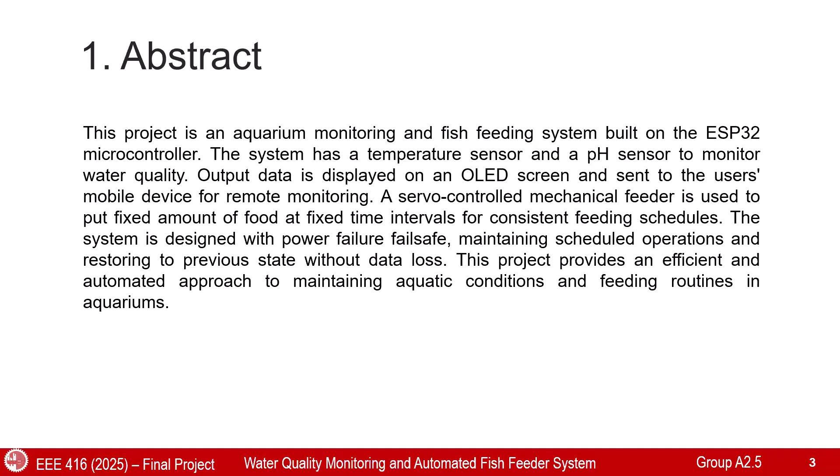Introduction: The aquarium industry requires efficient methods to maintain ideal water conditions. Traditional manual methods are time consuming and prone to errors. Our IoT-based system provides real-time monitoring of critical water parameters and automates feeding, ensuring precise and timely care for fish.

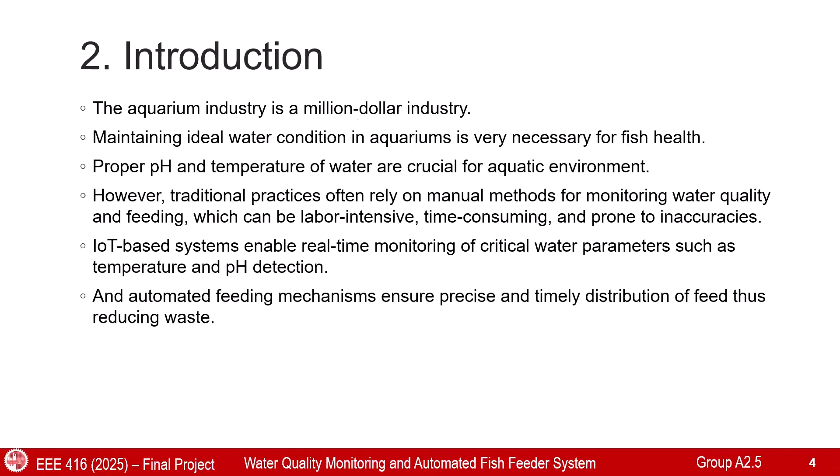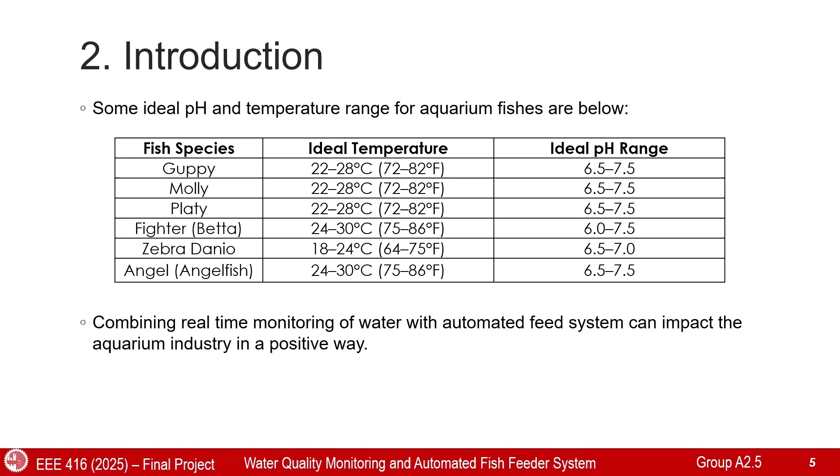Each fish species has specific ideal temperature and pH ranges for optimal health. The system is designed to meet these requirements, providing the right conditions for a variety of species like guppies, mollies, and bettas, ensuring a healthy aquatic environment.

Identification of scope: The system offers real-time monitoring, automated feeding, and fail-safe mechanisms for uninterrupted operation. It is also scalable, making it suitable for both small and large aquarium setups. The Blynk app allows remote monitoring and data logging, providing a user-friendly experience.

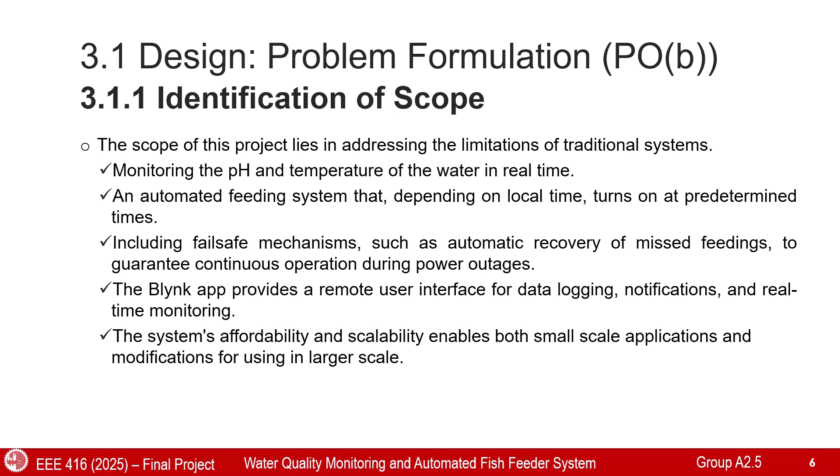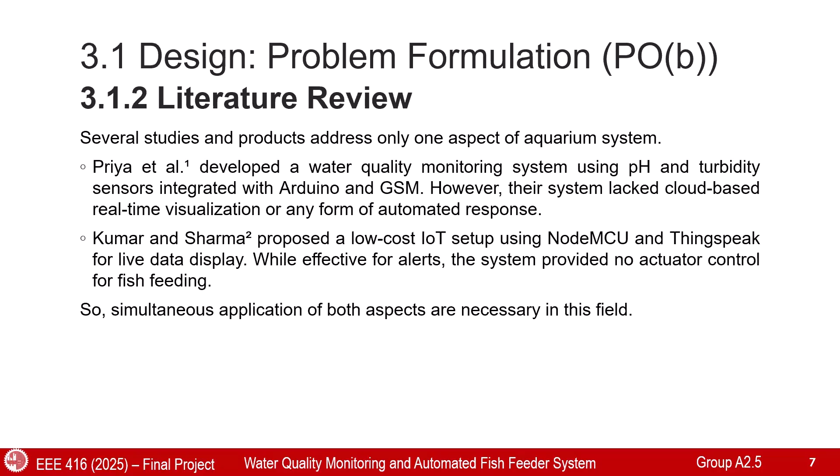Literature review: Existing systems have focused on either water quality monitoring or feeding. However, our project combines both, addressing the gaps by integrating real-time monitoring, automated feeding, and cloud-based control, offering a comprehensive solution for aquarium management.

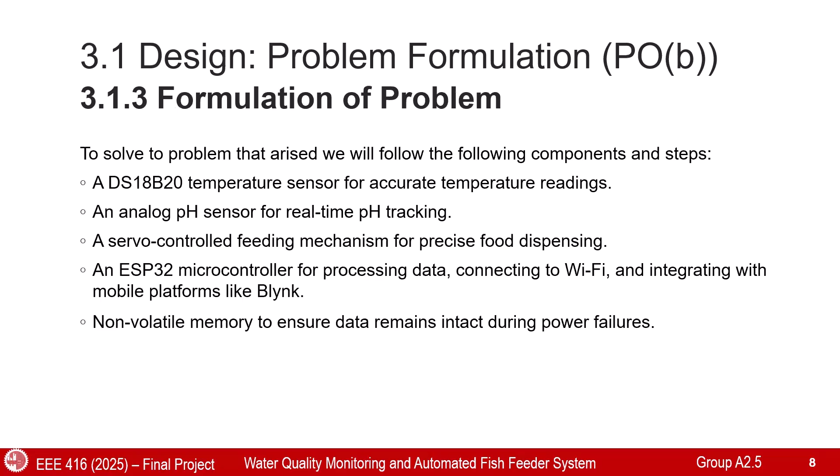Formulation of problem: This project solves the problem of inconsistent water quality and feeding schedules by integrating a temperature sensor, pH sensor, servo-controlled feeder, and an ESP32 microcontroller. Non-volatile memory ensures data retention during power failures, guaranteeing system reliability.

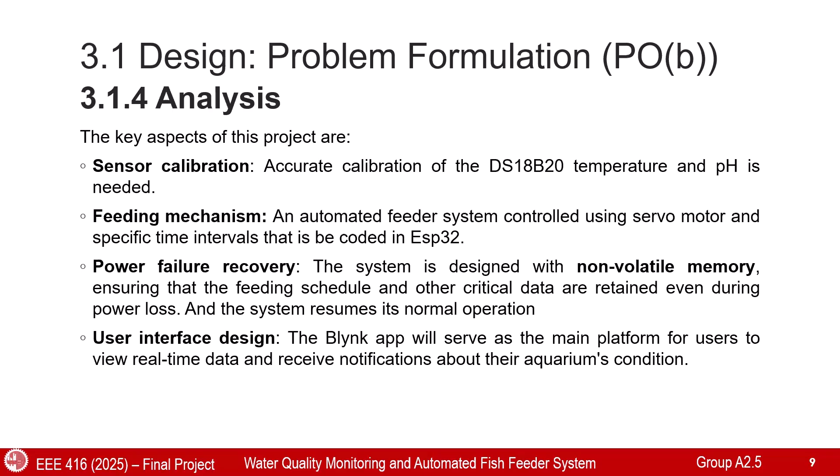Analysis: The system design ensures accurate calibration of sensors for reliable data, automated food dispensing programmed into the ESP32, power failure recovery through non-volatile memory, and a user-friendly interface through the Blynk app.

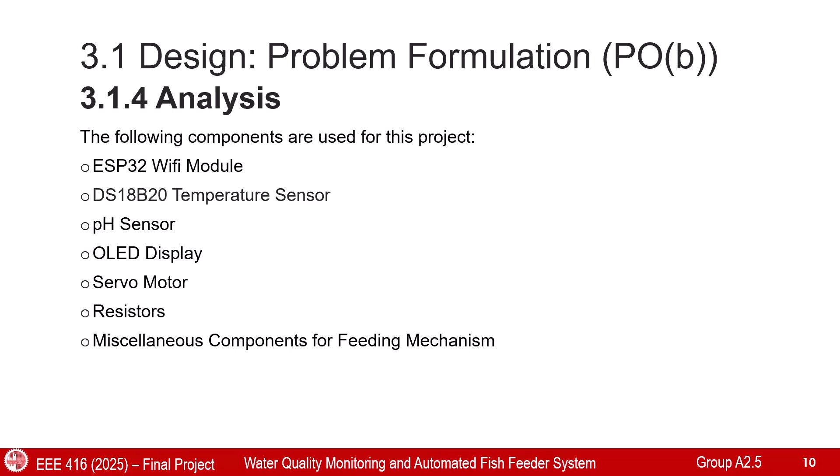The following components are used for this project: ESP32 Wi-Fi module, DS18B20 temperature sensor, pH sensor, OLED display, servo motor, resistor, and miscellaneous components for the feeding mechanism.

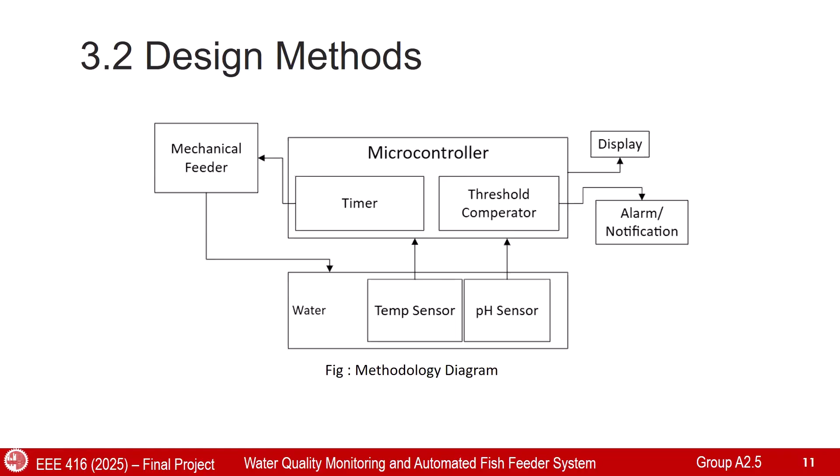So this is the step-by-step methods of our project.

Firstly, initialization takes place. We set up the feeding interval, the threshold for safe range of temperature and pH, then calibrate the sensors and initialize the OLED and servo motors.

For the data processing part, we convert the analog signals of the sensors to output values: for temperature, it's degree Celsius, and for pH, it's on a 0 to 14 scale. We then compare the timer count with the feeding time and show the current temperature and pH values on the OLED screen and in the Blynk app as well.

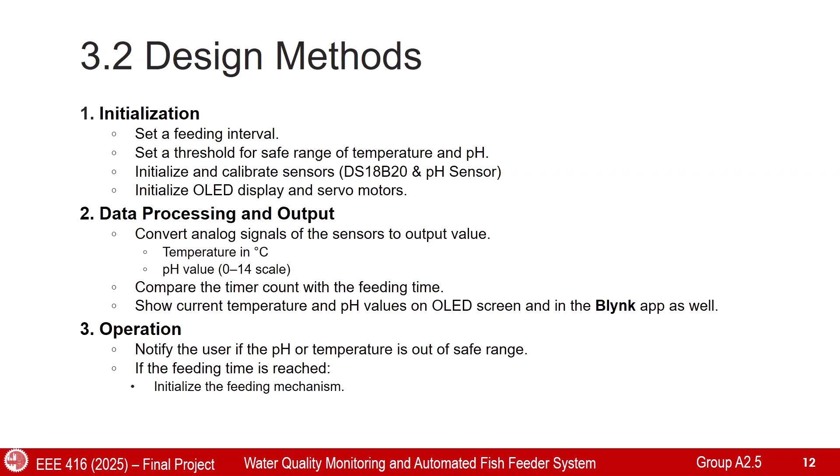For the operation part, we notify the user if the pH and temperature is out of the safe range, if the feeding time has been reached, or if the feeding has somehow been disrupted.

We have also integrated a fail-safe system in our project, and it will access the local time via the Wi-Fi network to use as a reference for the feeding schedule. When the module detects the current local time matching the scheduled feeding time, it will activate the feeding mechanism.

For the feeder, we have used a servo motor to operate the machine, and when the servo motor rotates, the food comes out of the food container into the water.

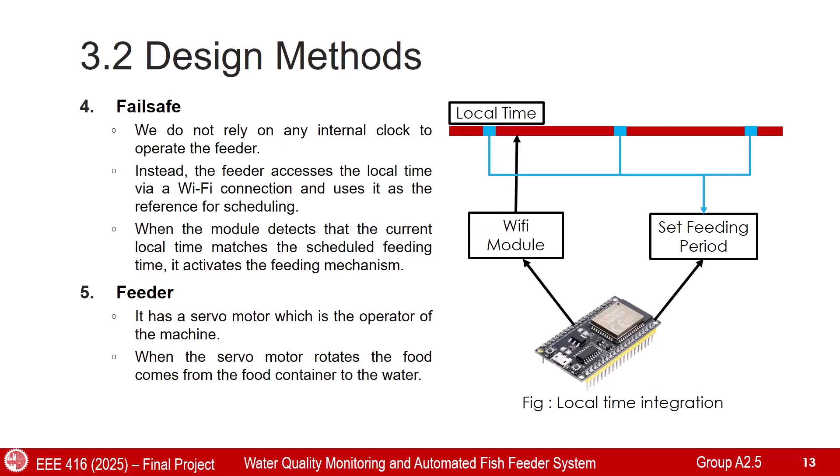Firstly, the pH sensor. The pH sensor is calibrated using standard buffer solutions, as you can see in the pictures, of pH 4, 6.86, and 9.18.

And then we have basically plotted a straight line equation through the corresponding voltages we get for these standard buffers, and using that straight line equation we will be able to find any pH in between these standard buffer ranges.

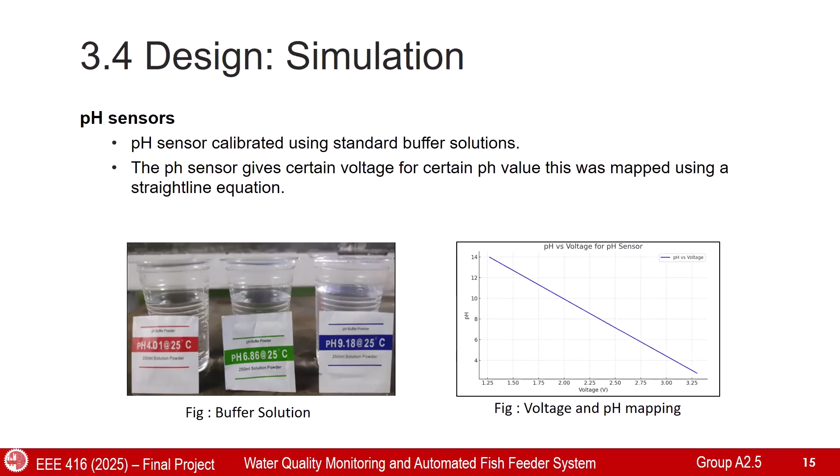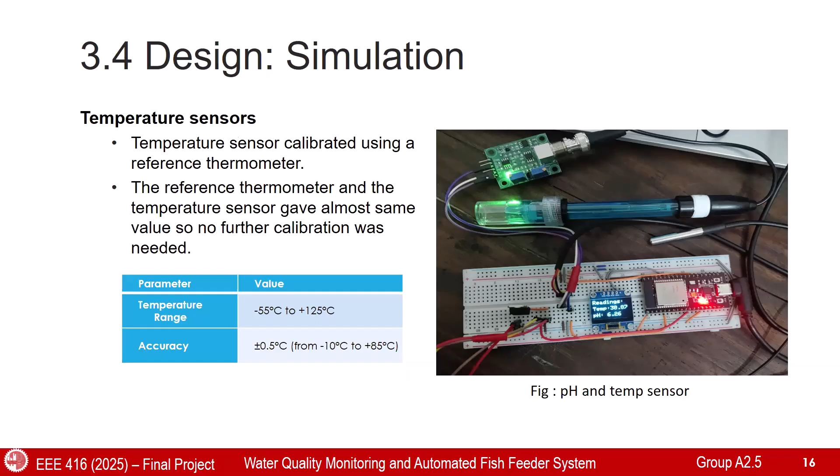For the temperature sensors, we have used a reference thermometer to calibrate it, but as we saw, the reference thermometer and temperature sensor gave almost the same result, so no further calibration is needed. The temperature range of the sensor is -55 to 125 degrees Celsius, and accuracy is ±0.5 degrees, so it is basically very accurate.

And for the mechanical feeder part, we have made some 3D printed components. As you can see from the picture, there will be a screw and some tube for the base, and there will be a holder, and these will all be connected. As you can see in the right picture, all these things are connected to make the whole mechanical feeder part.

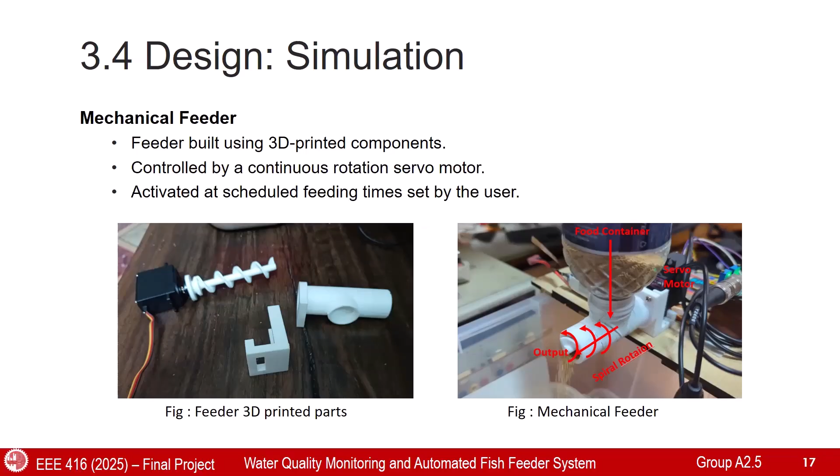And finally, for the real-time monitoring part, we use the Blynk app for data transmission and also showing the values of pH and temperature in the Blynk app. Also in the Blynk app, we will get automatic notifications if any of the range is crossed, or a feeding time is somehow missed.

And we have integrated Wi-Fi connectivity in this data transmission, so it will take continuous power to operate, and it will always be connected to Wi-Fi for any of the information that is needed for the system to work.

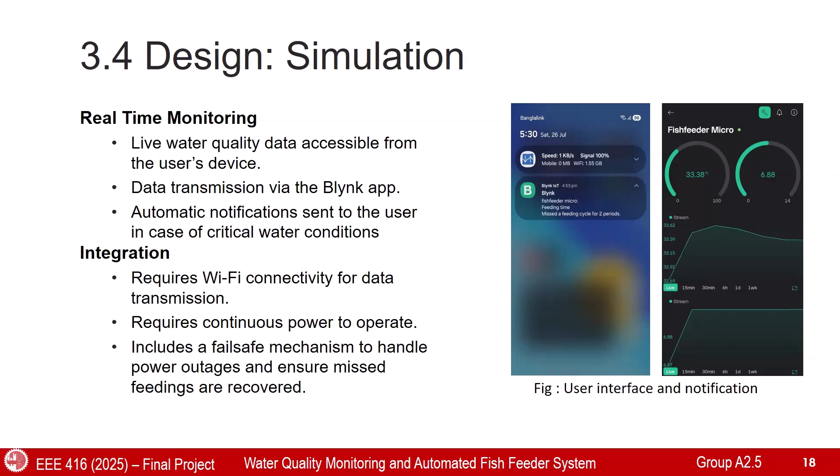Thank you. Hardware design of our project.

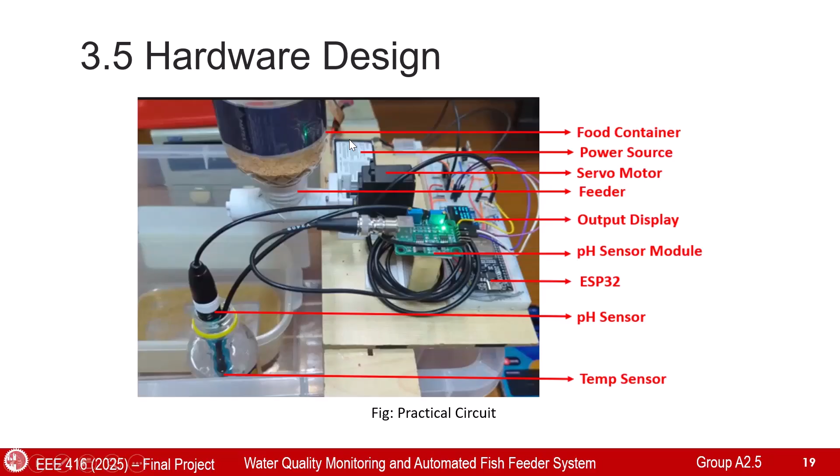In this interface, we can see that we are monitoring the last 15 minutes of data. In the Blynk IoT, we can live monitor the temperature and the pH on our mobile phone.

And also we have added a feature where we will have a notification for any missed feeding periods or any critical value for the pH and temperature. Here is a demo, and also we have added an OLED screen for live monitoring of the water quality.

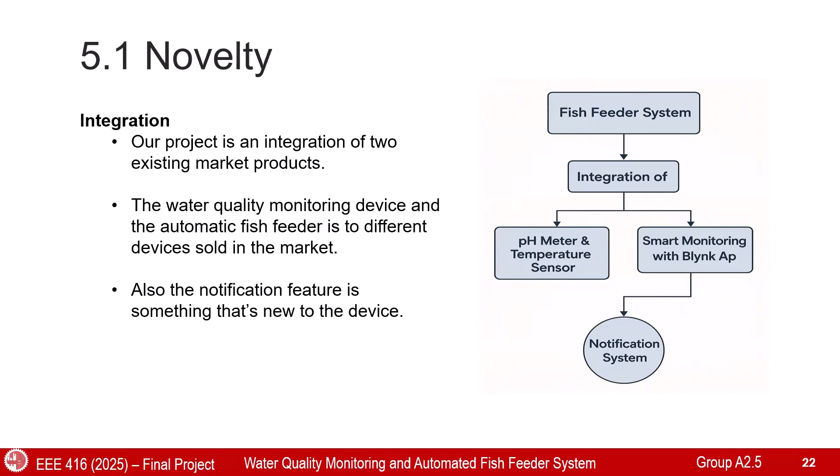For the novelty of our project, we have mainly integrated two existing market products: one is a pH meter and temperature sensor, and another is an automatic fish feeder. We have also added the feature of notification and the live monitoring system, integrating all these three products into one in our project. And we have also added a power loss recovery feature.

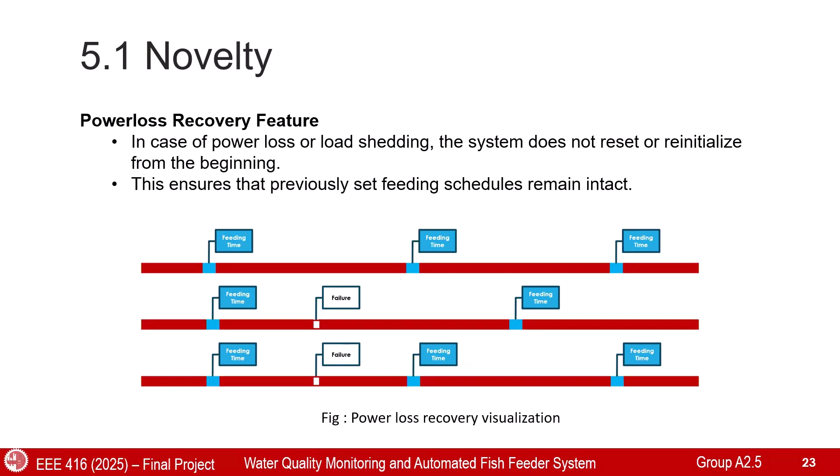Normally, what happens with existing products is that when a power failure occurs in the middle of the feeding time, the system initializes again at the failure point, and the feeding time changes. But for our project, the feeding time will not change, and after the failure, it will recover the previous data.

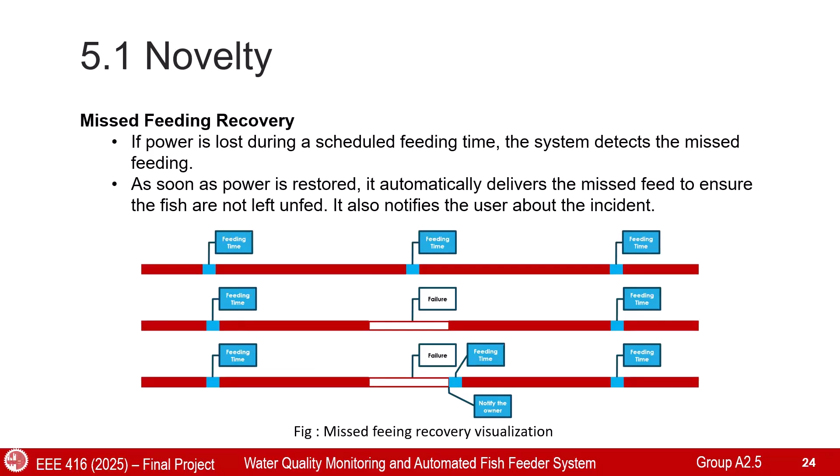Another feature that we have added: what if the power loss failure occurs exactly at the feeding time? For normal devices existing in the market, when a failure occurs directly at the feeding time, the machine will ignore that feeding time and go to the next feeding time to feed the fishes. But for our project, whenever a failure occurs, the system will recognize that failure and notify the owner that a failure has occurred, and as soon as the power comes back, it will feed the fishes as soon as possible.

And another feature that we have added is data recovery. Whenever a power failure happens, the previously saved data in the ESP32 module gets deleted.

The time that we have saved previously gets deleted, so every time we go into the loop, we store and load the data from a non-volatile memory in the ESP32 microcontroller.

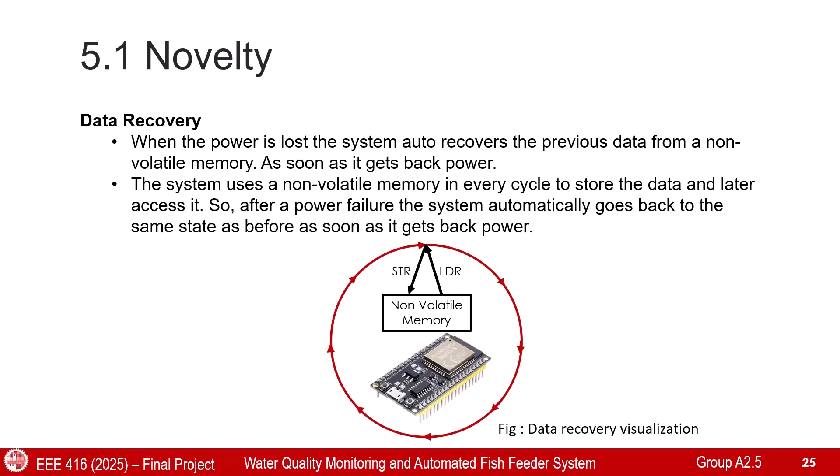In this way, we can recover the data whenever a power loss or failure happens in the project. We have some limitations in our project. The first is its dependency on Wi-Fi or internet connection, as we are taking our reference time from the NTP server for the local time. Whenever the internet connection is disrupted, the machine cannot work properly, and the system is optimized for a single missing period, but when multiple missing cycles happen, the system cannot recover. A battery backup can mitigate the power outage issue, but it still does not solve the Wi-Fi dependency. Any disturbance in the sensor can cause improper data to be shown.

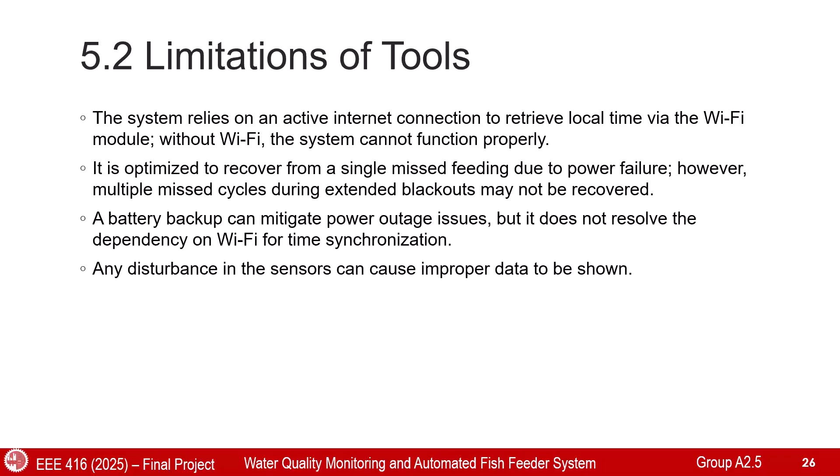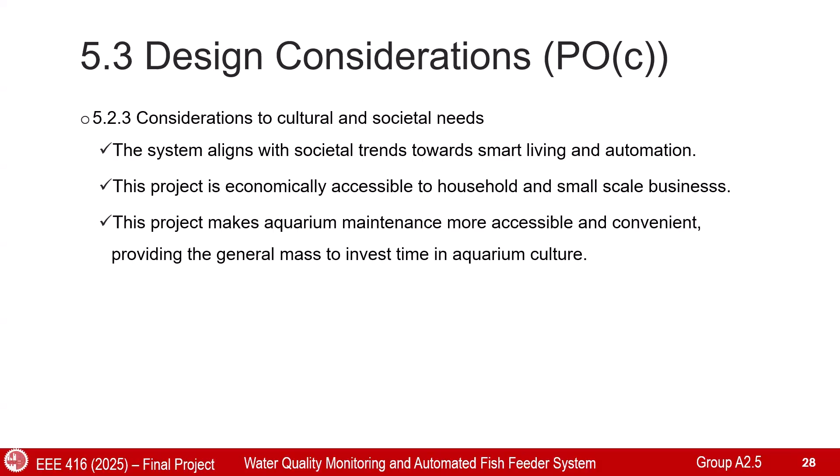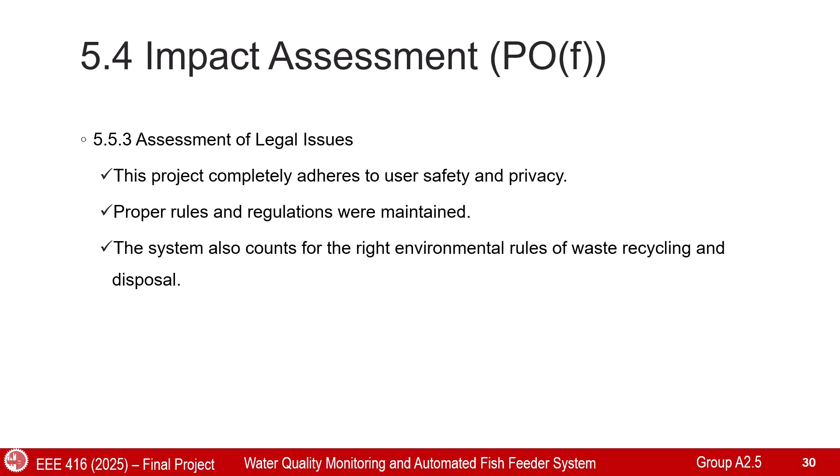This is our design consideration: the public health and safety, environmental, cultural, and societal aspects we have considered for designing our project. This is the impact assessment, meaning our project and subsequent prototype, if industrially produced, what effect it will have on society and culture and health and safety issues, and what we have considered within a legally defined boundary. This is the sustainability evaluation of our project.

If fish feeding is done manually, there are problems related to overfeeding, underfeeding, irregular feeding schedules, water pollution, and real-time monitoring, with a subsequent increase in hazardous materials or polluted water that will be fatal for the fish residing inside. If we use an automated system, we can solve these problems.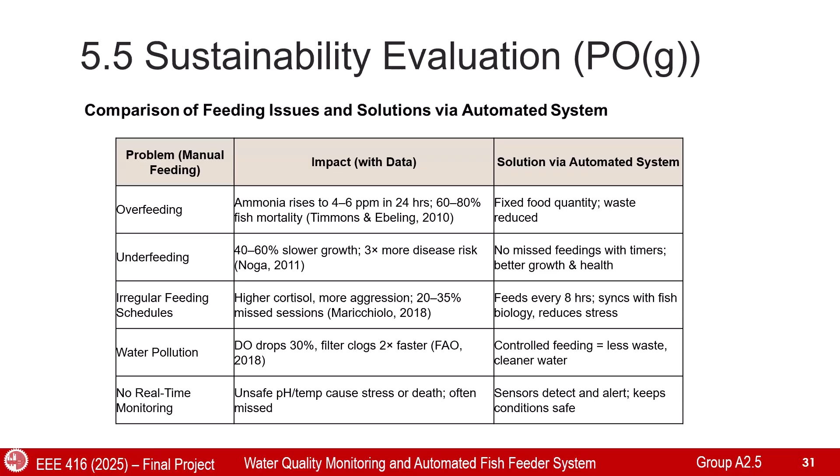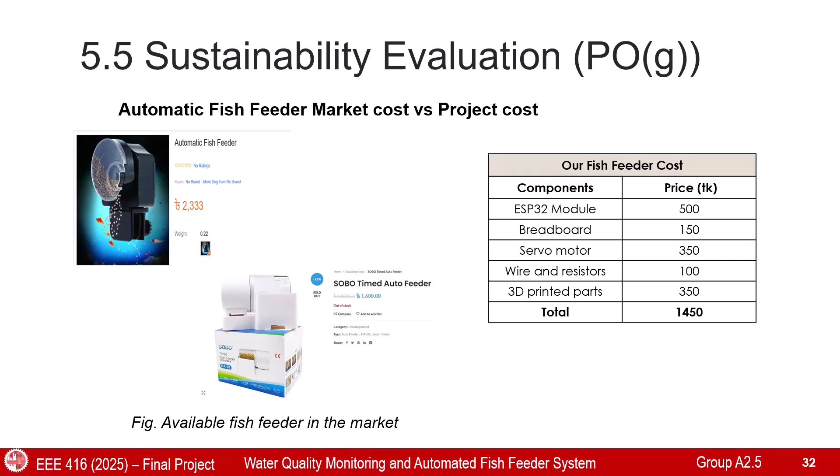This is the automated fish feeder cost. Our project has mainly two parts: the automated fish feeder part and the water monitoring part. The automated fish feeder part available in the market is significantly higher than our estimated budget, but our fish feeder cost is considerably lower than what is available in the market. The key feature in our design is that the total cost is lower than existing items in the market, and timely food dispersion reduces waste in the water and keeps the fish in check. The project is also scalable to an industrial scale, so it can be used in larger cases.

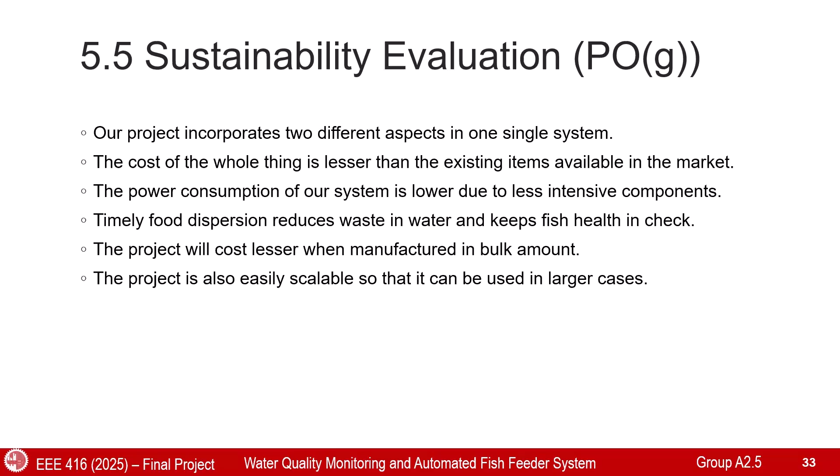This is our individual contribution. Roll 51, Ahamad Abtahi, has focused on the mechanical feeder system, feeder structure, and servo mechanism. Nazmus Shakib, Roll 52, Nazmus Shakib Tushar, has integrated the Blynk IoT platform with our project, and also did the pin assignment, device link, and user interface. Mr. Maksudur Rahman Turzo calibrated the sensors with buffer solution and thermometer, meaning he integrated the pH sensor, which had to be calibrated manually at first. This is a very tough task.

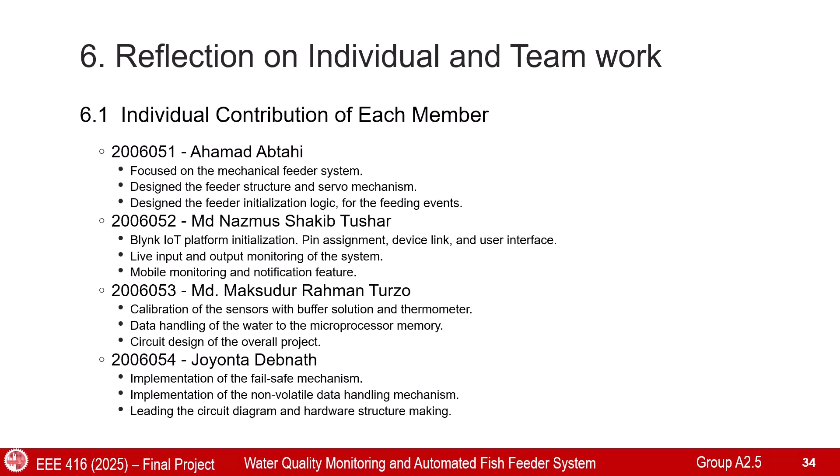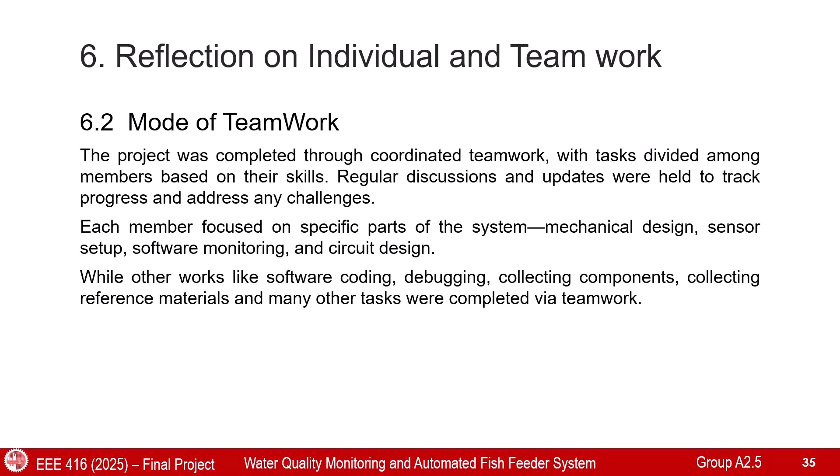Mr. Joyonta, Roll 54, has implemented the fail-safe system, and also did the circuit diagram and hardware structure making. We have distributed the various tasks according to skills and preference, and everyone has participated in both the hardware and simulation and software parts.

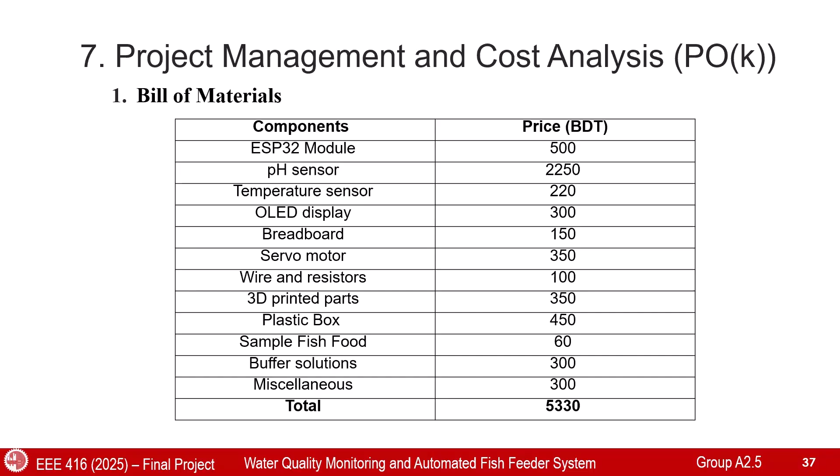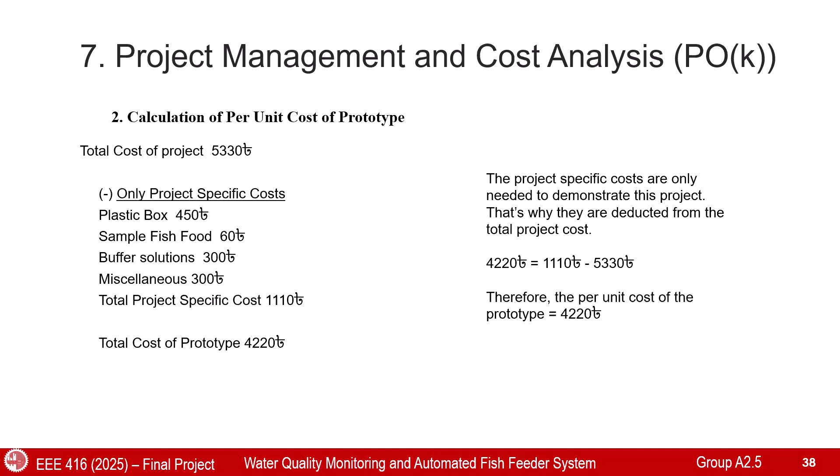To calculate the prototype cost, we have deducted only the project-specific costs. The project-specific costs are plastic box, fish food, and miscellaneous cost, which are only essential for demonstration. But if we produce them industrially, it is not necessary to include them. So we have deducted it, and subsequently the cost of the project prototype remains 4,220 taka. If industrially produced, the average bulk discount on components is usually 25%, and there is an overhead cost of almost 150 taka.

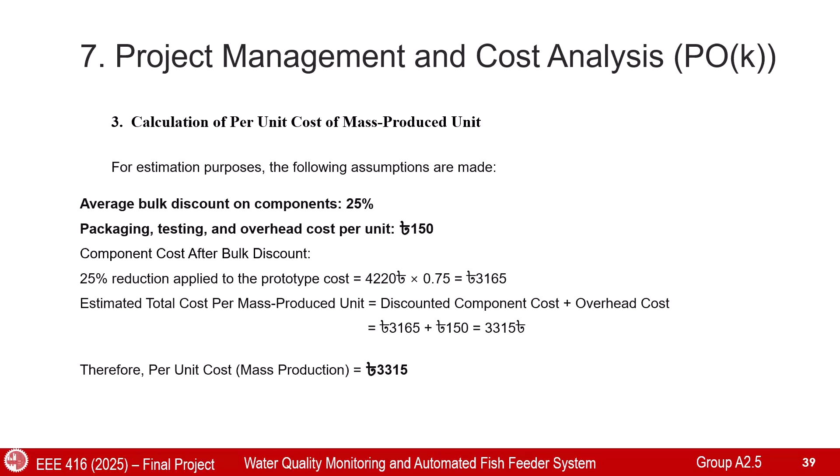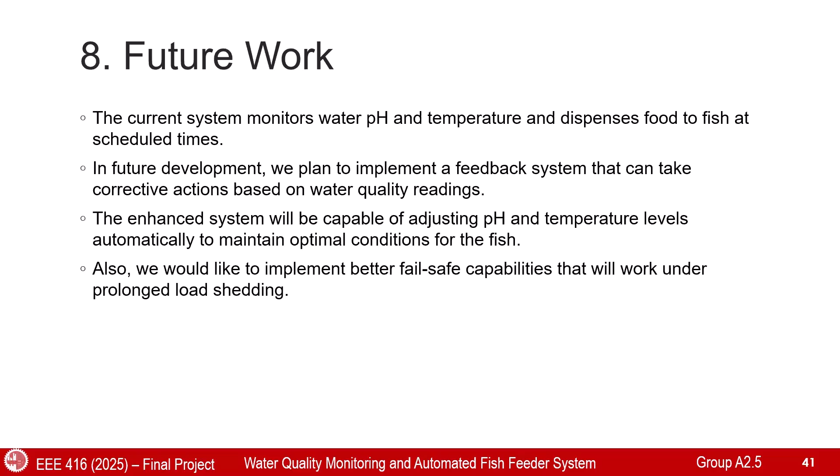In future work, we can automatically calibrate and control the pH and temperature levels. Also, we can automatically control the fish feeding. And we would like to implement better fail-safe capabilities that will work under prolonged outages.